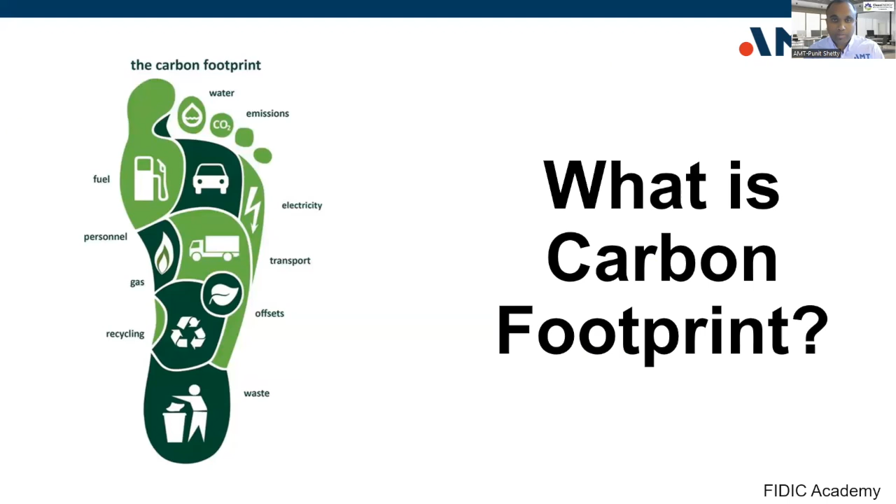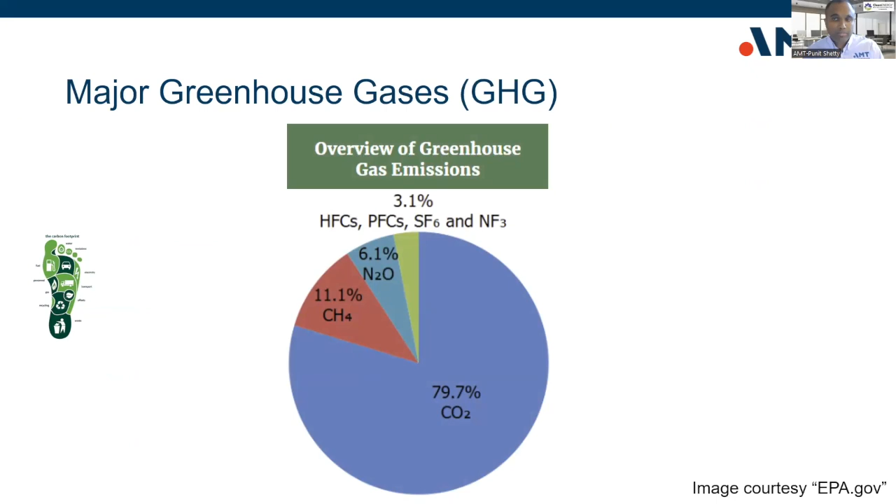The primary greenhouse gases contributing to global warming include carbon dioxide, methane, nitrous oxide, and various fluorinated gases. These gases trap heat in the Earth's atmosphere, driving climate change. Carbon dioxide is the most prevalent greenhouse gas, or GHG, released primarily through the burning of fossil fuels - coal, oil, or natural gas - and deforestation. Following that are some small but significant proportions of other gases.

Greenhouse gas emissions originate from multiple sectors, mostly energy production, transportation, industry, agriculture, and waste management. Each sector plays a crucial role in the global emission landscape.

Burning of coal, natural gas, and oil for electricity and heat is the largest single source of global CO2 emissions. Transportation includes emissions from cars, trucks, ships, trains, and planes. The sector primarily emits CO2, but also methane and nitrous oxide. This is followed by industrial activities which emit greenhouse gases through the use of fossil fuels for energy, chemical reactions during production processes, and the use of fluorinated gases. Understanding these sectors and associated greenhouse gas emissions is crucial for developing effective strategies to reduce the global carbon footprint.

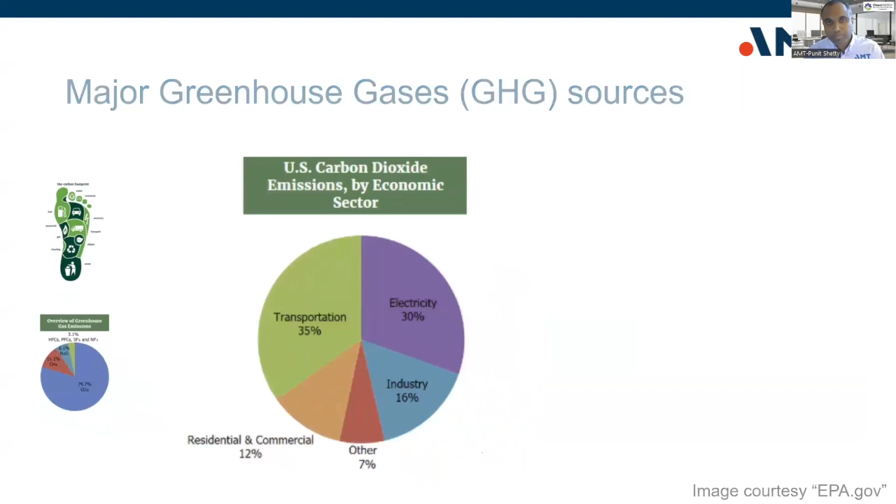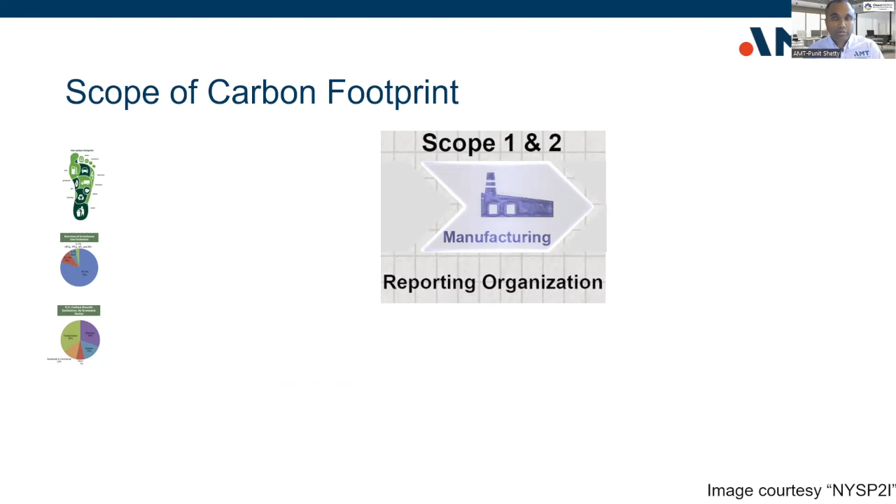To better understand and manage emissions, greenhouse gas emissions are categorized into 3 scopes. Scope 1 covers direct emissions from owned sources or those controlled by the organization. Scope 2 covers indirect emissions from purchased energy like steam, heating, and cooling. Although these emissions physically occur at the facility where electricity, steam, heating, or cooling is generated, they are accounted for in the organization's Scope 2, because they result from the organization's energy usage.

Scope 3 emissions are all the other indirect emissions not covered in Scope 2. They occur in the value chain of the reporting organization, both upstream and downstream. Some examples of Scope 3 are transportation and distribution, waste generated in operations, business travel, employee commuting, and processing of sold products.

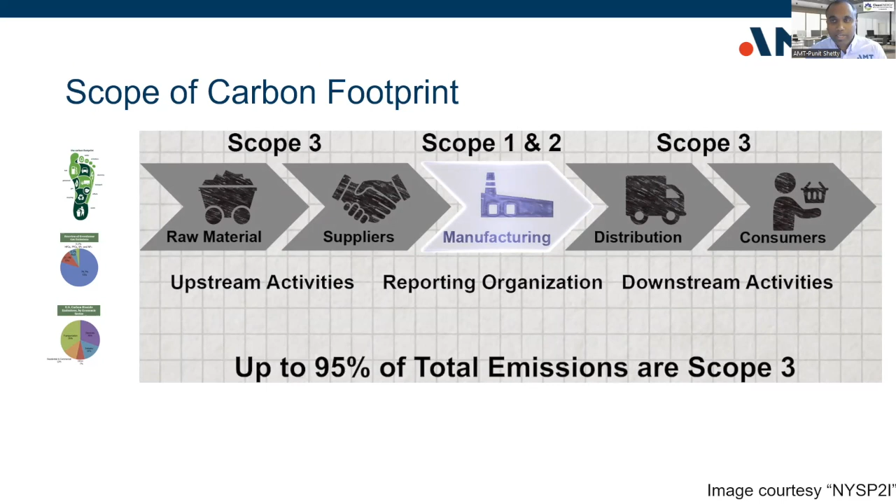Scope 3 is often the largest source of emissions for many organizations, covering a wide array of activities along the entire value chain. Understanding and managing these scopes help organizations develop comprehensive greenhouse gas reduction strategies, measure their carbon footprint accurately, and report their emissions transparently.

Now that we understand what a carbon footprint is and what the different scopes are, let's see what different organizations are doing to mitigate some of the risks.

The Department of Energy, or DOE, has created an industrial decarbonization roadmap, which outlines 4 key pillars: energy efficiency, industrial electrification, low carbon fuels, and carbon capture, utilization, and storage, or CCUS. These strategies are essential for reducing emissions in the industrial sector.

The objective of energy efficiency is to reduce energy consumption across industrial processes, which in turn reduces greenhouse gas emissions. Industrial electrification encompasses replacing fossil fuel-based energy sources with electricity, especially from renewable sources, in industrial processes.

The objective of low carbon fuel feedstocks and energy sources is to replace high carbon fuels and feedstocks with low carbon alternatives. Finally, carbon capture, utilization, and storage includes capturing the CO2 emissions from industrial processes and either storing it underground or utilizing it in other products.

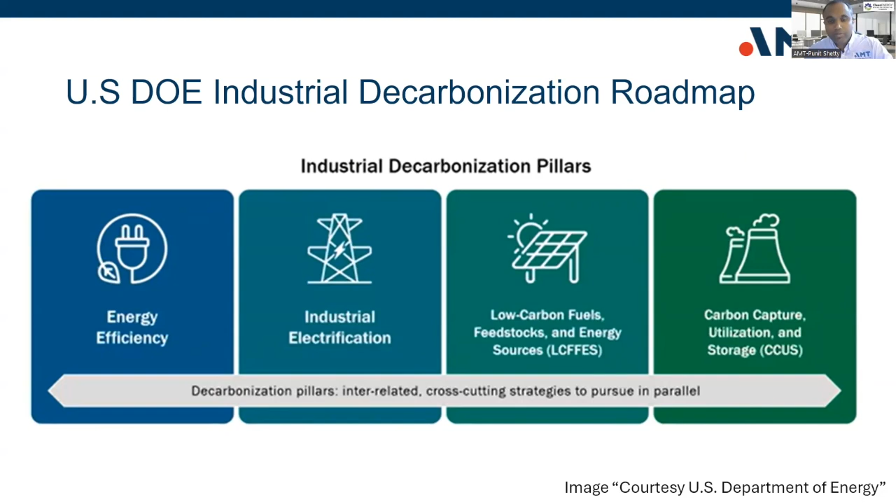This DOE roadmap focuses on these 4 pillars as essential strategies to decarbonize the industrial sector, which is a major contributor to GHG emissions. Implementing these pillars will help industries reduce their carbon footprint, increase competitiveness, and contribute to addressing global climate change.

To complement this roadmap, the DOE has outlined a comprehensive strategy to achieve net zero greenhouse gas emissions by 2050. The strategy is aligned with broader national and global climate goals, aiming to limit global warming to 1.5 degrees centigrade above pre-industrial levels.

The path to net zero by 2050 involves a combination of technological advancements, policy measures, and sector-specific strategies. The DOE's path to net zero by 2050 is an ambitious but necessary roadmap that integrates technological innovation, policy support, and stakeholder engagement across all sectors of the economy.

By implementing these strategies, the US aims to lead the world in mitigating climate change while fostering economic growth and ensuring energy security.

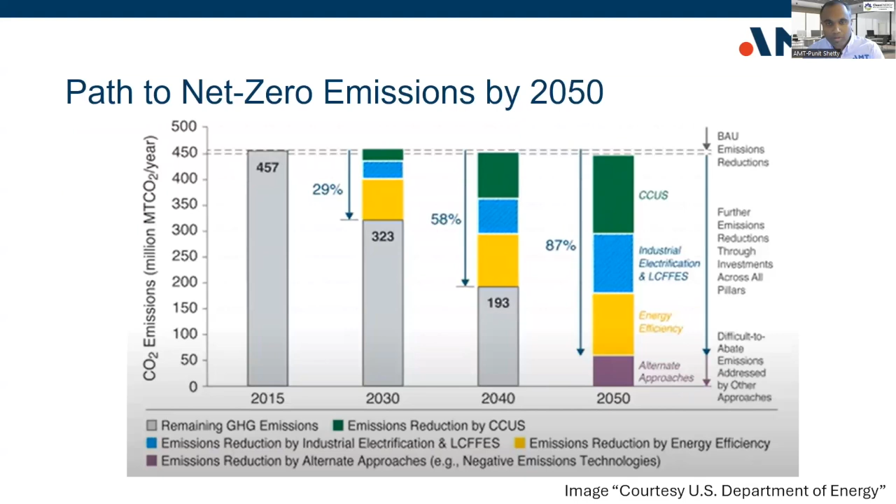Moving on to state goals, the Climate Leadership and Community Protection Act, or CLCPA, or the Climate Act, as some of you might have heard, in New York sets very ambitious goals, including a 40% reduction in emissions by 2030 and achieving 100% zero emission electricity by 2040.

We are here to help you align with these targets. New York State must reduce statewide greenhouse gas emissions by 40% from 1990 levels, and must achieve a 100% carbon-free electricity system by 2040. This means that all electricity generated in the state must come from a zero-emission source, including renewable, nuclear, and possibly fossil fuel plants equipped with carbon capture and storage technology.

New York State also has a goal to achieve an 85% reduction in greenhouse gas emissions from 1990 levels by 2050. The remaining 15% of emissions that are difficult to eliminate will need to be offset or captured, achieving net zero greenhouse gas emissions across the entire state.

Now that we have explored the background of greenhouse gases and the various federal and state goals for emission reduction, the question arises: why should we as manufacturers care about these targets?

In today's competitive market, the pressure to reduce emissions isn't just about compliance, it's about staying ahead. Reducing your carbon footprint can lead to significant cost savings, enhance your brand reputation, and open up new opportunities in a growing green economy. Additionally, aligning with these goals helps future-proof your business against regulatory changes, supply chain demands, and evolving consumer preferences.

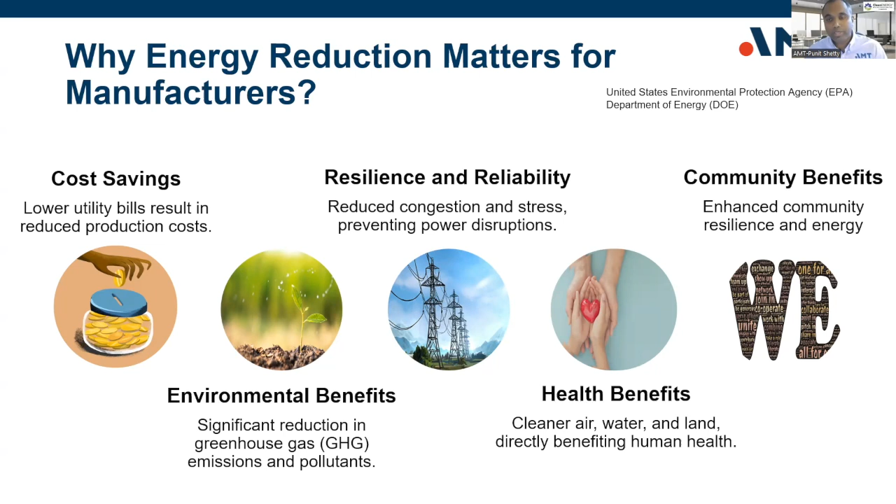Whether it's coping with energy price volatility, maintaining consistent production, or preparing for external disruptions, energy efficiency strengthens your ability to keep your businesses running smoothly. Energy reduction is also about creating healthier environments for your employees, your community, and the planet. By embracing energy efficient practices, manufacturers can play a crucial role in improving public health, both now and in future. Also, you can achieve a win-win by cutting costs and increasing competitiveness while contributing to a more sustainable future. Let us explore how we can help you realize these benefits through a targeted energy reduction strategy.

Before looking at the strategy, let's take a moment to understand what motivates you, your organization, to reduce energy consumption. There is a quick poll. The poll options are cost savings, environmental impact, regulatory compliance, corporate social responsibility, and innovation. Give me a second while I launch it. You have around 20 seconds to respond, and then you should be able to see live results.

Excellent, we have a few more votes to go. All right, so we got 15 out of 16 votes, and looks like we have a good mix with cost savings leading the initiative. I just shared the results with you guys, I hope everybody can see it. We have 87% cost saving, and then a smaller share for environmental impact, and second is corporate social responsibility, and a tie for last place between regulatory and innovation. All right, so thanks for voting.

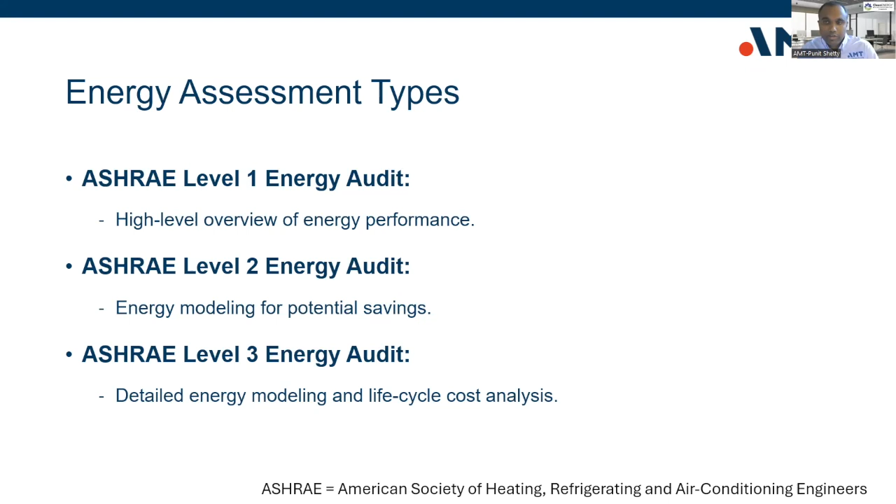We offer various resources for all these energy assessments and audits, ranging from no-cost surveys to comprehensive audits. Depending on your needs, we can guide you through the best option.

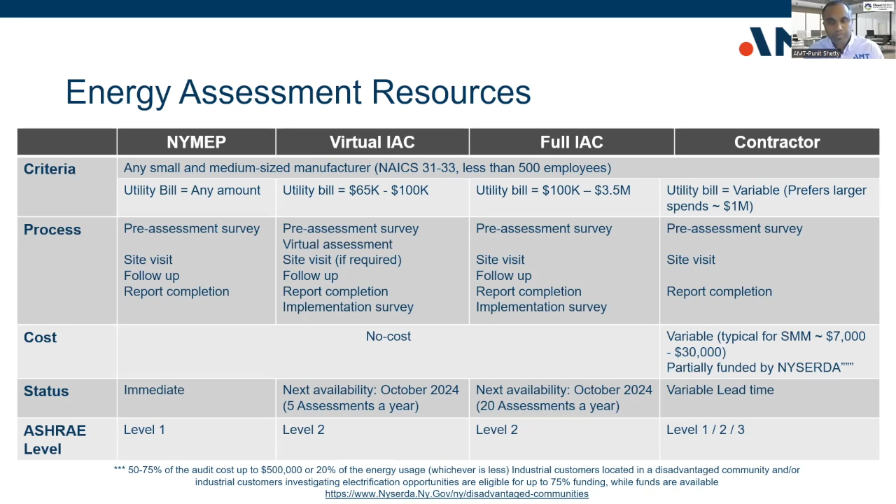These rebates help reduce the initial cost of purchasing and installing energy-efficient equipment or renewable energy systems, making it more affordable for customers to upgrade to more sustainable solutions. They are a valuable tool for both consumers and the utility companies, helping to promote the adoption of energy-efficient and renewable technologies. They play a crucial role in reducing overall energy consumption, lowering greenhouse gas emissions, and supporting the transition to a more sustainable energy system.

We can help you with all three: NYSEG, RG&E, National Grid, and Department of Energy. We are still working with the municipalities to see how we can connect them to the manufacturers if you're in a municipality region.

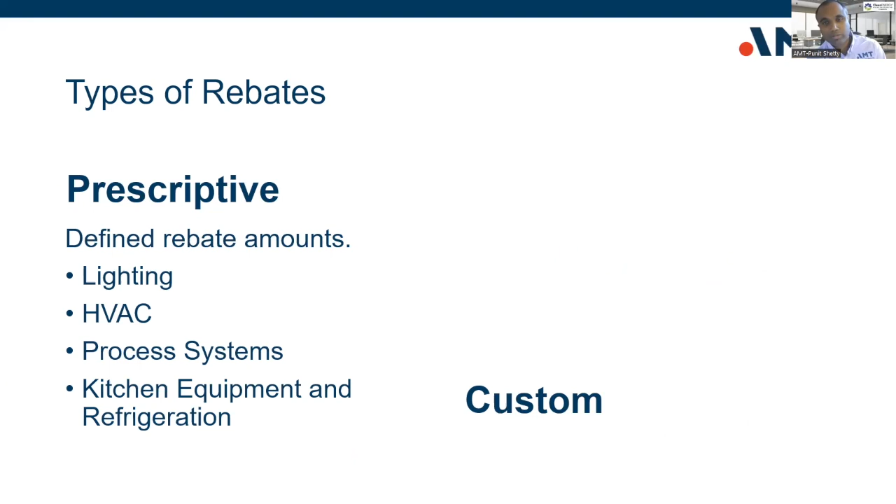There are two main types of rebates: prescriptive, which are a set amount for common upgrades, and custom, which are performance-based for more complex projects. The prescriptive incentives provide specific rebates or financial support for predefined energy efficiency measures. These measures are often standard, straightforward upgrades with established savings and cost. The custom incentives are more flexible and tailored to specific projects that may not fit into a predefined category of the prescriptive program. These incentives are typically based on actual energy savings achieved by the project.

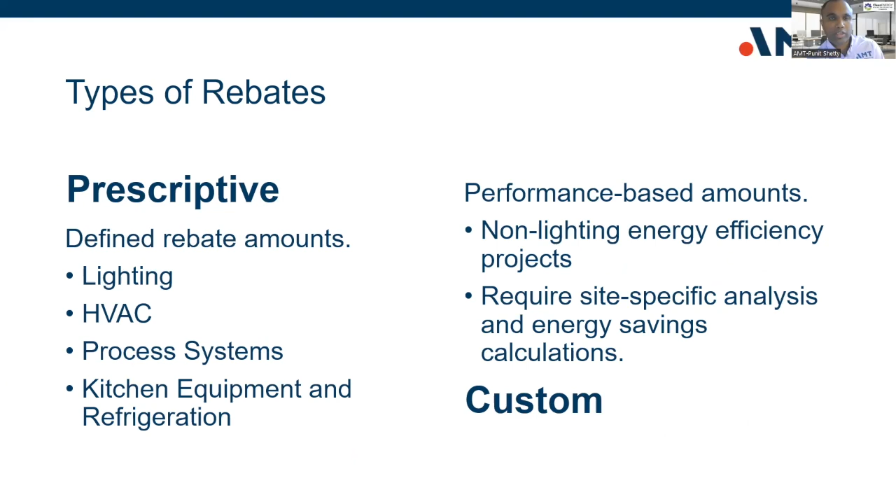NYSEG and RG&E offer various rebates for lighting, HVAC, process systems, and more. Understanding these can help you maximize your savings. This slide outlines two different incentive structures by NYSEG and RG&E: prescriptive and custom. A simple example of a prescriptive rebate would be replacing lamps, which gets you a rebate ranging from $6 to $12 per lamp, depending upon the power and size of the lamp.

Fixture rebates range from $25 to $360 per fixture. Another example would be weather stripping and air sealing, which can get you a rebate of $150 per square foot of room for improvement that reduces drafts and heat loss. The custom option, on the other hand, offers more flexibility, allowing for tailored solutions and higher potential rebates based on the actual energy savings your project achieves.

I would recommend taking advantage of the current lighting rebates, which are currently higher than usual, a significant saving opportunity. However, please note that these generous rebates will expire in 2026. So now is an ideal time to upgrade and maximize your energy savings before these incentives are gone, if you have not already made use of these.

I'll give you a moment to take a look at some of these numbers. I know it can be a little overwhelming to look at all those numbers, tiny as they are, but we are here to help you secure all those rebates whenever you're ready to do any of those projects.

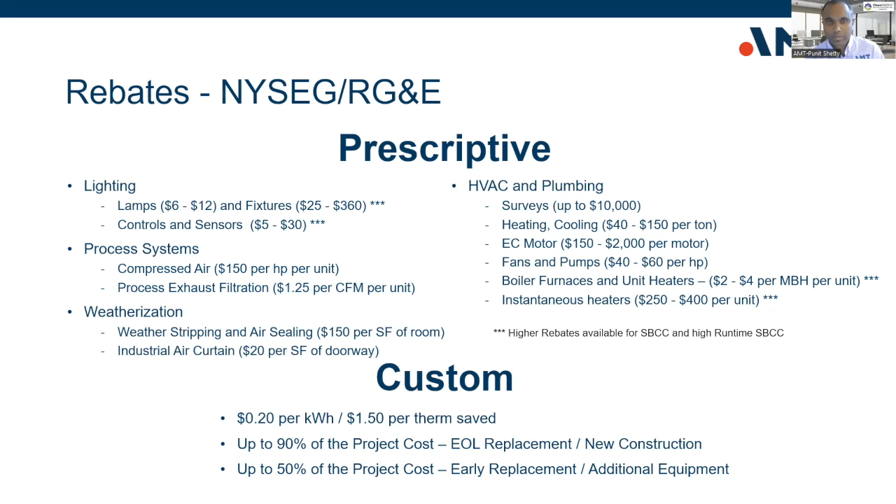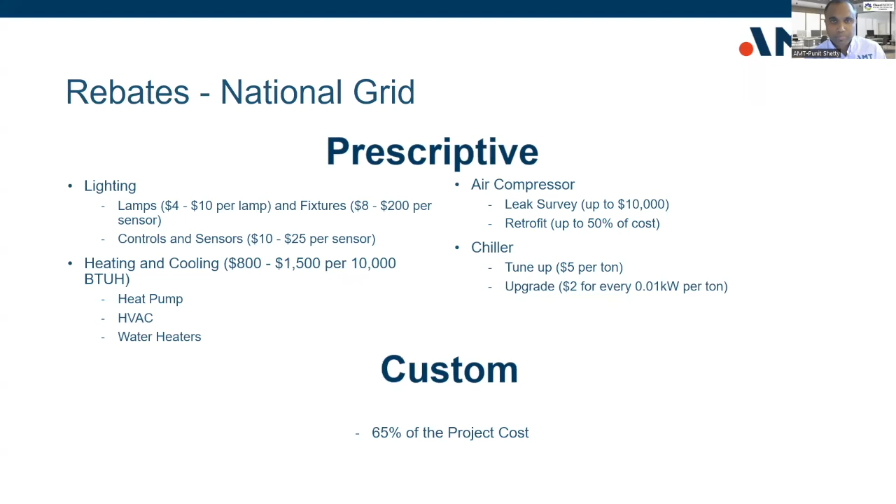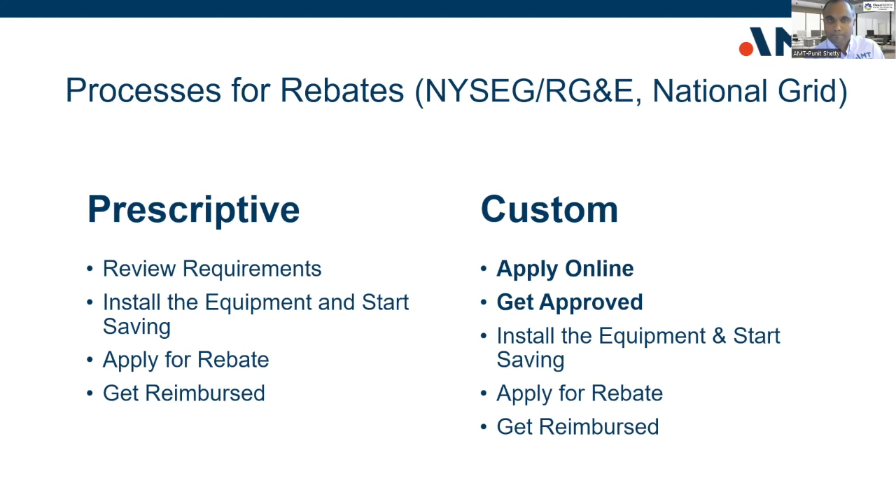The process for prescriptive and custom is slightly different. Prescriptive is straightforward: we install the upgrade, apply for a rebate, and get reimbursed. Custom typically involves reviewing requirements and applying for pre-approval. Once approved, we install the equipment, apply for a rebate, and receive reimbursement. The custom process is a bit more involved than the prescriptive. The DOE also offers rebates through programs like Extended Product System Rebates, or EPS, which help offset the cost of energy efficient systems.

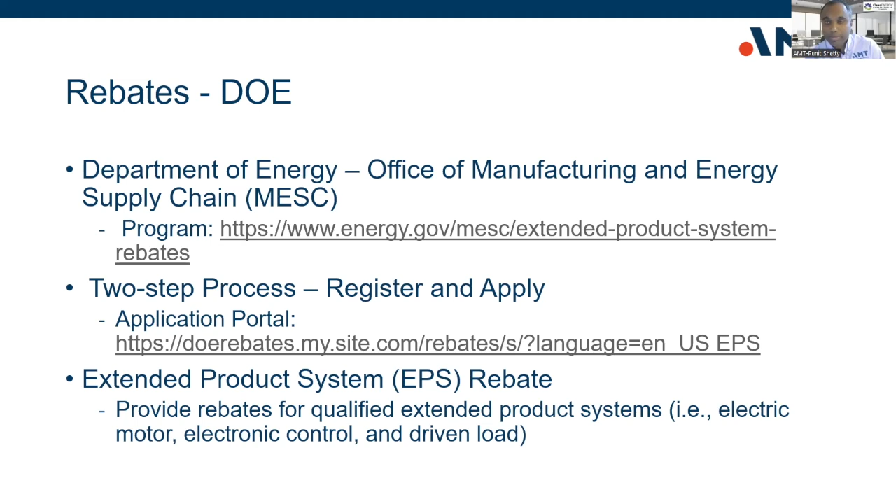If you're looking to upgrade your manufacturing systems and reduce energy cost, the DOE's Manufacturing and Energy Supply Chain, or MESC, offers a fantastic opportunity for manufacturers through their EPS rebate program. It provides rebates for qualified extended product systems like electric motors, electronic controls, and driven loads, which can significantly reduce your energy consumption and cost. You can take advantage of it by applying through the DOE's simple application portal. You can explore more details about the program - I've shared the links in the slide, which I'll share with you later. Don't miss the opportunity to upgrade your system while securing rebates that directly support energy efficient technologies.

So we have almost reached the halfway point of the presentation, and we've talked about the roadmap, assessments, and rebates. As with any journey, measuring our progress is crucial. One of the key indicators of progress is energy consumption, a major factor in our sustainability efforts.

To better understand where we stand collectively, we'd like to ask you all a question: how much has your organization reduced its energy consumption in the past year? This will help us gauge where you are on your energy reduction journey. We're seeing some votes coming in.

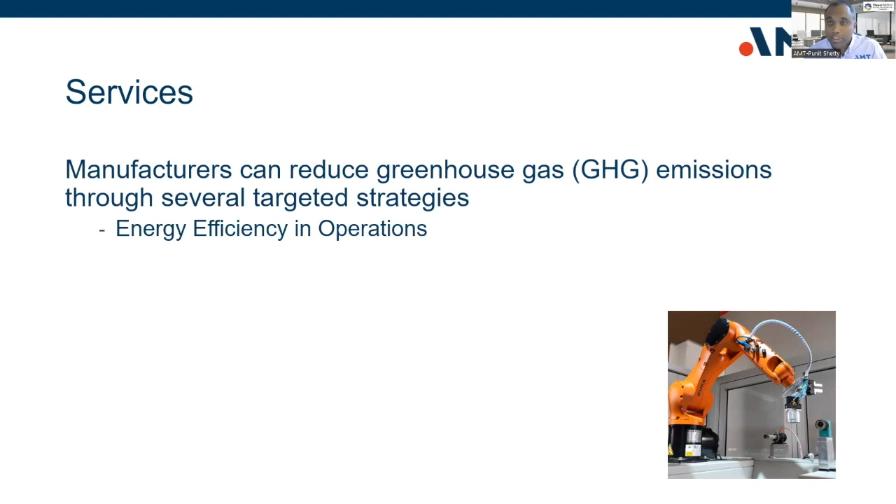As manufacturers, we play a crucial role in reducing greenhouse gas emissions, which is essential for both environmental sustainability and long-term business resilience. This slide outlines several targeted strategies that can help us achieve significant reductions in our carbon footprint. The first and most immediate opportunity is improving energy efficiency within our operations. This involves optimizing equipment, upgrading to more efficient technologies, and implementing better energy management practices. These actions not only reduce emissions but also lower energy costs, providing a dual benefit.

Another critical strategy is transitioning to an alternate low carbon energy source. This could mean shifting from fossil fuels to renewable energy, such as solar, wind, or hydropower. By diversifying our energy mix, we can significantly cut down on emissions while also stabilizing energy costs in the long term. The third strategy focuses on sustainable material use and reducing waste.

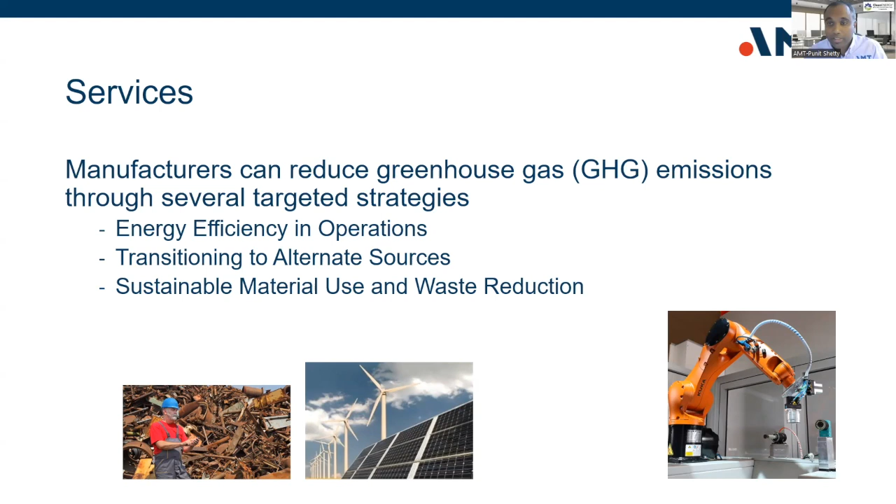This includes selecting material with lower environmental impact, improving recycling processes, and minimizing waste production. By adopting a circular approach to materials, we not only reduce greenhouse gas emissions, but also conserve natural resources.

Next, we can look at our supply chain and transportation methods by optimizing logistics, adopting more fuel-efficient transportation, and sourcing materials locally where possible. We can decrease emissions associated with moving goods. Collaboration with suppliers to improve their sustainability practices is also a key component.

Finally, carbon management and offsetting are essential for tackling emissions that are difficult to eliminate. This involves monitoring and managing our carbon footprint closely and investing in carbon offset projects such as reforestation or renewable energy initiatives to compensate for unavoidable emissions. Together, these strategies provide a comprehensive approach to reducing greenhouse gas emissions, helping us contribute to global sustainability goals while also driving operational efficiency and innovation.

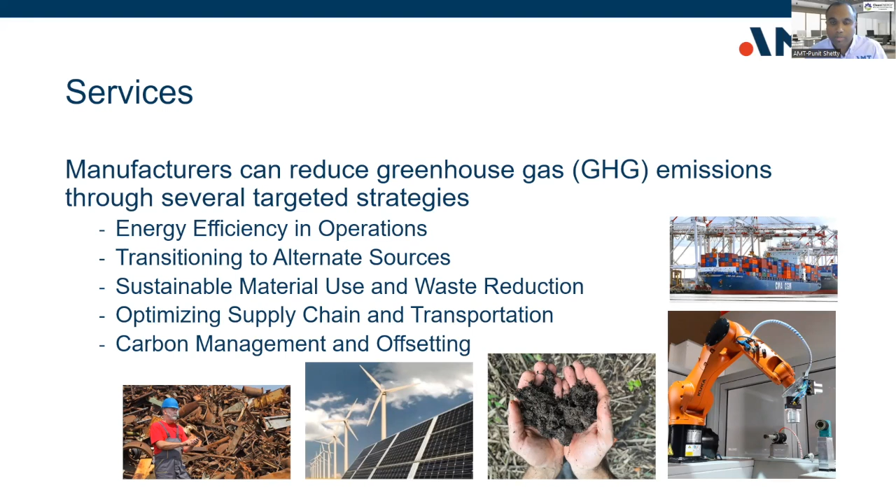Our first service is developing a strategic plan that aligns with your financial objectives and with your environmental and sustainability goals. This plan will integrate energy efficiency measures and sustainability initiatives with your operations, not only improving your bottom line, but also strengthening your organization's resilience to future challenges.

We can achieve this by training to help you develop a strategic energy management program, or SEM program. This training is essential for equipping your team with the skills needed to create and implement a robust SEM plan. The SEM program will guide you in continuously improving energy performance, identifying opportunities for efficiency, and achieving your energy goals over time.

Next, we can help establish a sustainable energy management system. This we can achieve by guiding you to becoming 50001 ready, which involves aligning with the DOE's ISO 50001 ready program. This program helps you implement an energy management system that meets international standards for energy performance without requiring formal certification.

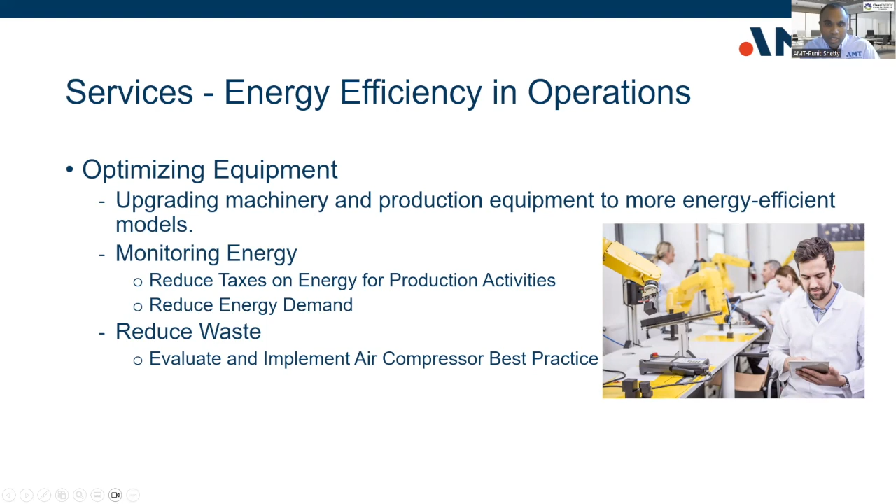Next, minimizing waste in the production process helps conserve energy. We can help you optimize your process so that you can reduce the energy required to manage the waste and improve overall operational efficiency. We can do this a number of ways.

Mainly, we can help evaluate and implement air compressor best practices, evaluating and implementing the best practices for operation such as regular maintenance, leak management, and using a right-sized compressor, which can lead to substantial energy savings.

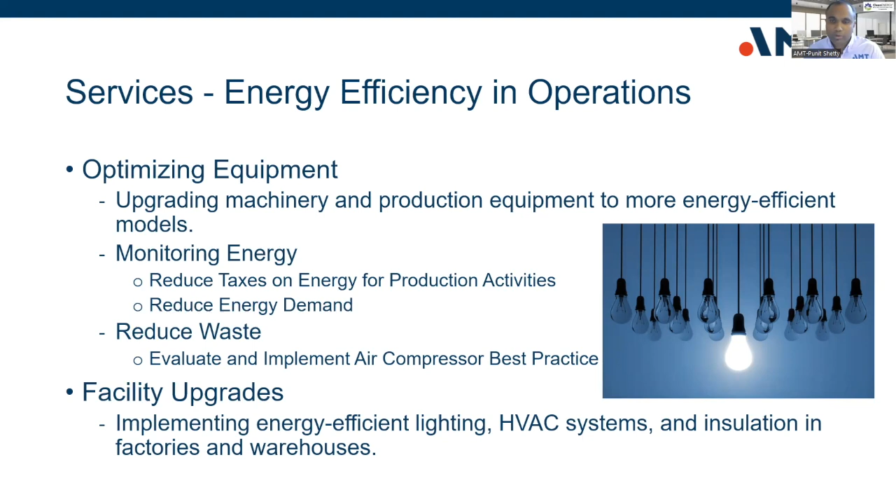Next, upgrading facilities with energy efficient lighting, HVAC systems, and insulation is crucial. This improvement enhances the overall energy performance of factories and warehouses, reducing heating and cooling costs and improving working conditions. So by employing these strategies, you can effectively enhance energy efficiency in your operations, reduce cost, and contribute to your organizational sustainability goals.

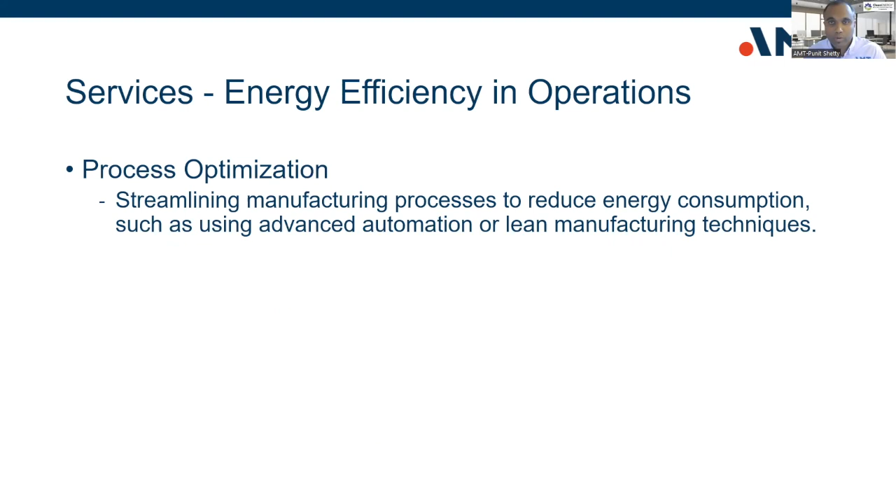Next, process optimization is another crucial strategy for reducing energy consumption and improving overall operational efficiency. Optimizing manufacturing processes involves streamlining operations to reduce energy consumption. This can be achieved through advanced automation, which can increase efficiency and precision, or by adopting lean manufacturing techniques that minimize waste and enhance productivity. By refining processes, you can lower energy use and boost overall efficiency.

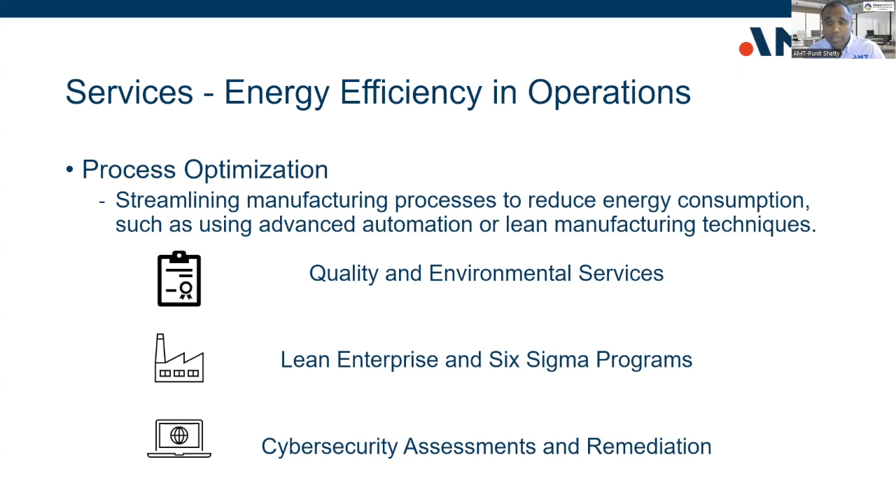So we can help with services like quality and environmental services, lean enterprise, and Six Sigma programs designed to enhance process efficiency and reduce waste. Cybersecurity is increasingly important in process optimization, especially as manufacturing systems become more connected. So by focusing on all these areas of process optimization, we can significantly reduce energy consumption, enhance efficiency, and achieve our sustainability goals while maintaining high operational standards.

Transitioning to alternate energy sources is another crucial step in reducing greenhouse gas emissions and enhancing energy sustainability. Here's how we can support your organization in this transition. One of the most effective ways is by installing renewable energy systems directly at your manufacturing sites. We can help you with that assessment. This includes solar panels, wind turbines, and other systems that can generate clean energy on site, reducing reliance on the traditional grid.

For small and medium size organizations especially, we have solutions like low cost solar energy installation, tailored for your needs. To complement renewable energy, we provide battery and energy storage solutions. These systems store excess energy generated by your renewable sources, ensuring a stable and reliable power supply even when production is low or demand is high. This enhances energy efficiency and resilience.

Another option is to source your electricity from a renewable provider through power purchase agreements or renewable energy certificates. This allows you to support green energy production and reduce your carbon footprint without needing to install systems on site. For facilities with higher energy demands, we can help with on-site combined heat and power systems, or CHP systems, which generate electricity and useful heat simultaneously, increasing energy efficiency and reducing waste. This is an excellent option for improving energy performance and reducing greenhouse gas emissions.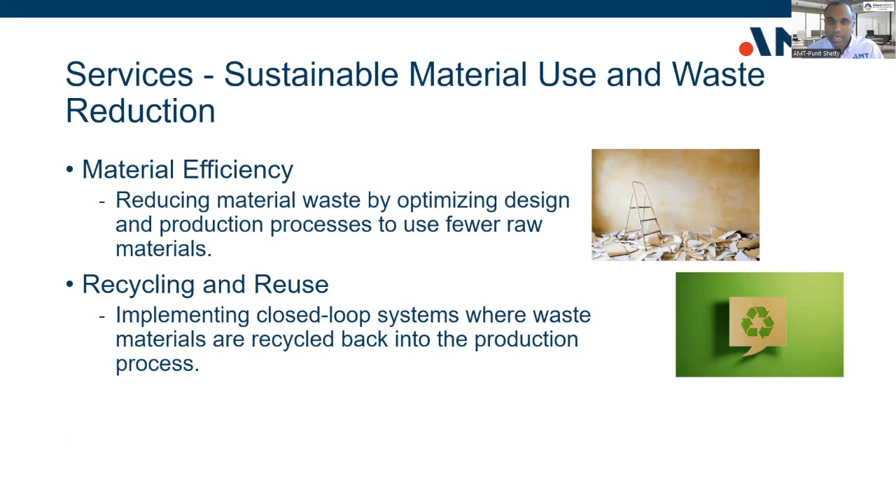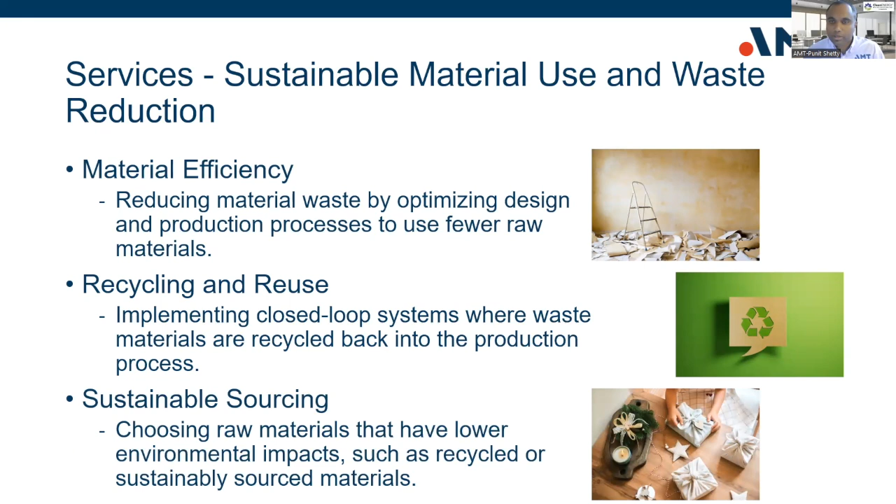Next, we can focus on implementing closed loop systems where waste materials are recycled back into the production process, ensuring materials are reused rather than discarded. Finally, we can assist in choosing raw materials that have lower environmental impacts, including sourcing recycled or sustainably produced materials, which support the broader goals of sustainability.

Optimizing your supply chain is crucial for enhancing sustainability, reducing risk, and improving overall efficiency. We begin by conducting comprehensive supply chain assessments to identify and prioritize opportunities for improvement. These assessments focus on pinpointing inefficiencies, reducing risk, and enhancing the overall resilience of your supply chain.

Next, we work on optimizing your logistics to reduce emissions and improve efficiency. Finally, we emphasize the importance of collaborating with suppliers to improve the sustainability of their practices, including working with them to reduce energy use, adopt low carbon technologies, and implement more sustainable practices. In summary, by focusing on these key areas, your organization can significantly improve supply chain management, reduce environmental impact, and enhance overall operational efficiency.

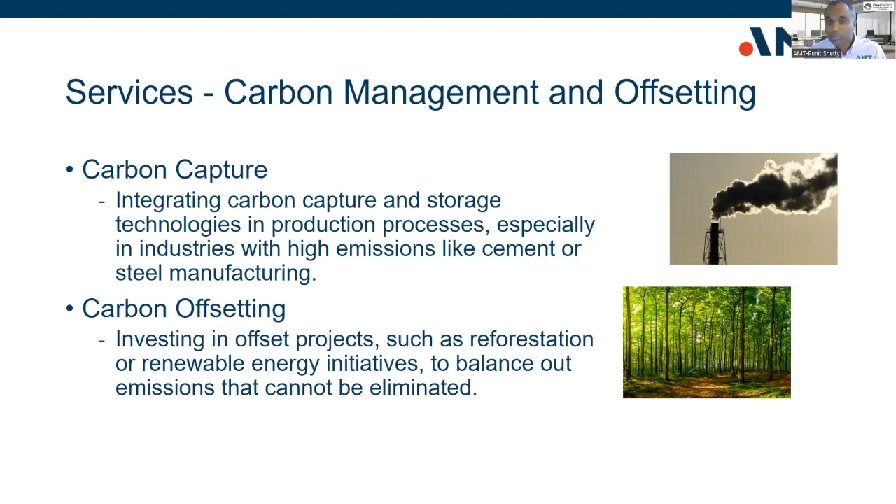Effective carbon management is essential for reducing your organization's environmental impact. For industries with significant emissions, we can help with solutions to integrate carbon capture and storage technology directly into the production process. In addition to reducing emissions, there are opportunities for carbon offsetting. This involves investing in offset projects like reforestation or renewable energy initiatives to balance out any emissions that cannot be entirely eliminated. By supporting these projects, you can achieve net zero emissions and contribute to broader environmental goals.

We have one last poll. We all know how crucial energy consumption is for both cost saving and environmental impact. However, implementing these strategies often comes with its own set of challenges. To better understand the common barriers we all face, we'd like to get your input. So the question is, what is the biggest challenge in implementing energy reduction strategies? Launching the poll right now. The options are cost, lack of knowledge, technology limitations, employee engagement, or regulatory compliance.

I see there are 15 participants, and 13 of them responded, so I did not bore anyone to sleep, so I'm happy about that. All right, we got 14 of them now, so I'll end the poll and share the results.

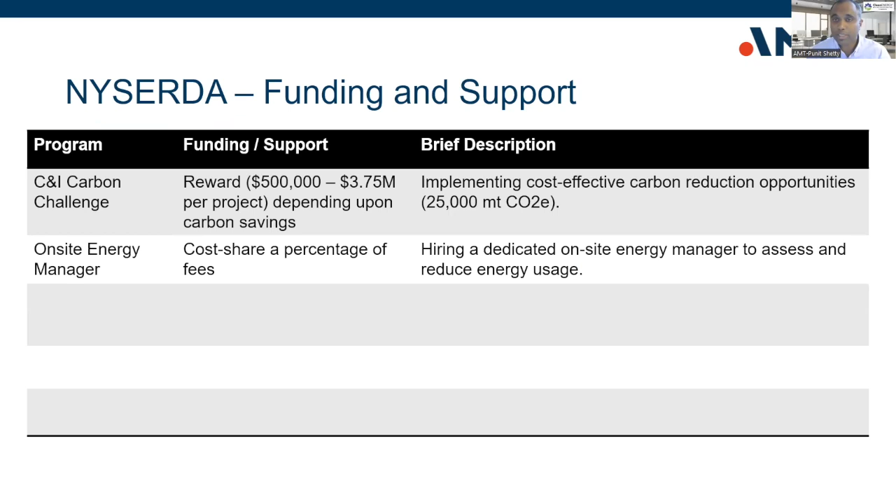The On-site Energy Manager program, again by NYSERDA but similar to the one by DOE, provides cost sharing for a percentage of fees associated with hiring a dedicated on-site energy manager. Their role focuses on assessing and reducing energy usage within your facility, helping you optimize energy performance and achieve savings. The FlexTech program offers a cost share of 50 to 75% for completing an energy study. So going back to the energy assessment by a contractor, whatever the cost is, it can be shared, and they take care of the cost share portion.

Next, the RTEM program provides a cost share of up to 30% for installing a cutting-edge real-time energy management system. This system allows for real-time monitoring and management of energy use, helping you optimize energy consumption and improve operational efficiency. Last but not least, the Strategic Energy Management (SEM) program offers a fully funded training program to help you develop an SEM plan.

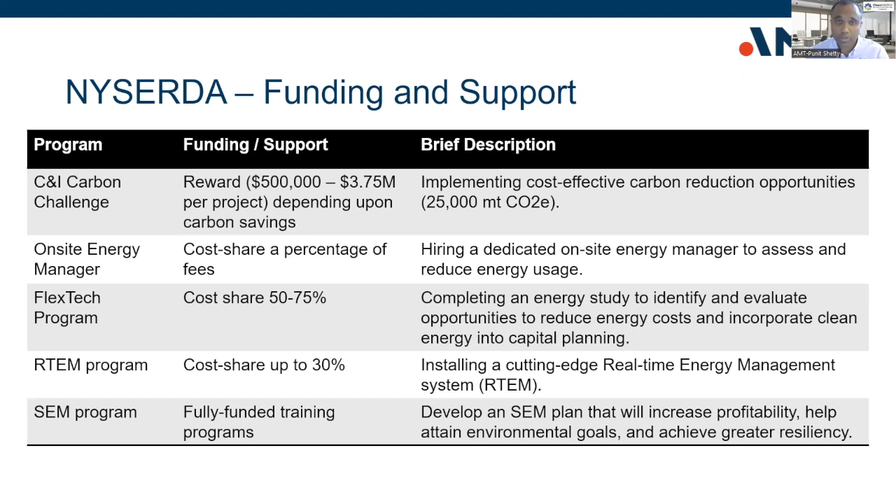This plan aims to increase profitability, support environmental goals, and enhance overall resiliency through effective energy management strategies. These programs offer diverse forms of support and funding to help you achieve your energy and sustainability objectives. There are some other forms of funding and support options apart from DOE and NYSERDA.

The Arise Mini Grant program provides funding up to $10,000 for various services, including consulting, design, and development. It's a great option for small-scale projects where you need support for specific services to advance your goals.

The New York State Pollution Prevention Institute program offers up to 90% funding along with comprehensive support. This includes initial assessment, solution development, implementation, and follow-up for projects related to technology commercialization, sustainable manufacturing, sustainable supply chain, and life cycle assessment (LCA). It's designed to support a range of environmental and sustainability projects.

National Grid, on the other hand, has a Manufacturing Productivity Program (MPP), which provides funding of 40 to 60%, up to $15,000 to $40,000, depending on the project type, if you're in the National Grid service area. It supports consulting projects aimed at improving productivity, fostering growth, or both. This program also helps manufacturers enhance their operational efficiency and overall productivity.

Lastly, the Workforce Training Grant offers 50 up to 90% funding for workforce development initiatives. This includes funding through the SUNY Workforce Development Training Grant and the Workforce Development Institute (WDI), as some of us know. These grants are aimed at enhancing skills and training for your workforce, supporting long-term growth and development. These programs provide a variety of financial support options to help us with our sustainability goals.

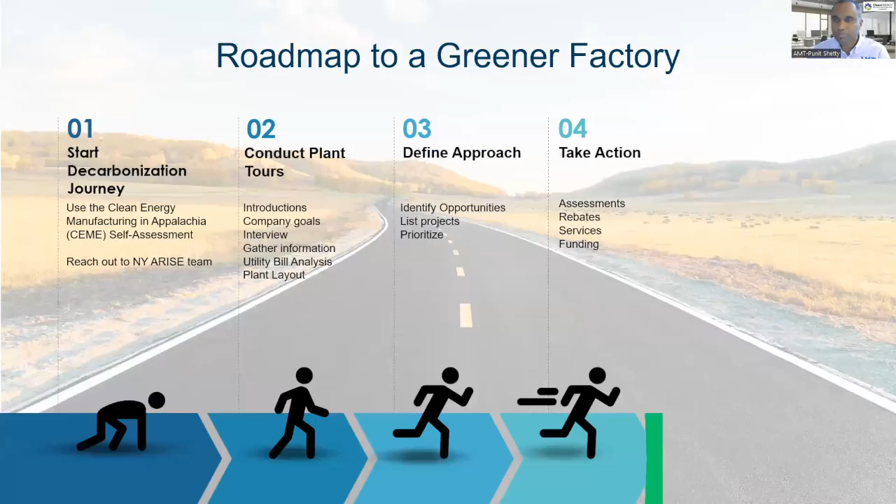Now let's recap the roadmap to the greener factory. We started with the self-assessment. We identify opportunities, we take action and implement the changes to achieve reduced energy usage, cost savings, and environmental benefit.